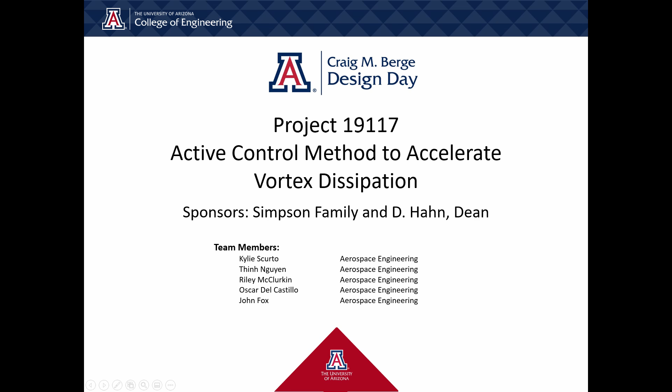Our project stemmed from a need to shorten time delay and increase safety during takeoff and landing of all aircraft on the runway. Today, it takes on average anywhere between 2 to 4 minutes between aircraft allowed to occupy the runway as a measure of safety against wingtip vortices.

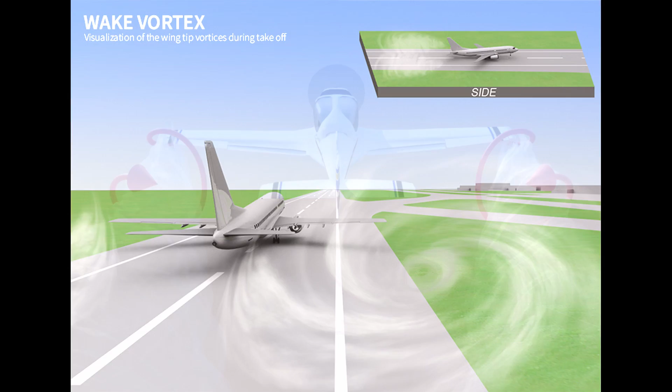These wingtip vortices form off the aircraft at takeoff velocities, creating circulation forces that drastically increase in strength with respect to the ground, making the atmosphere severely unstable for the next aircraft to attempt takeoff.

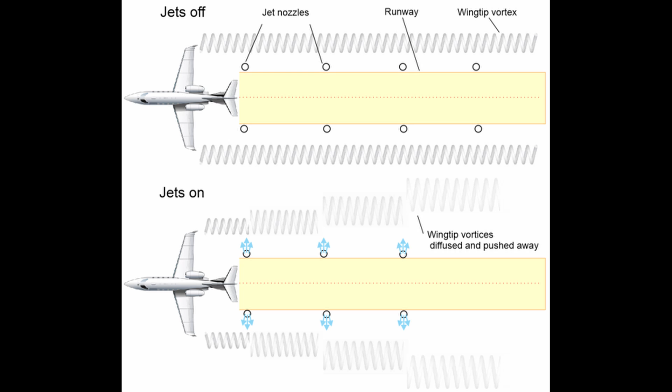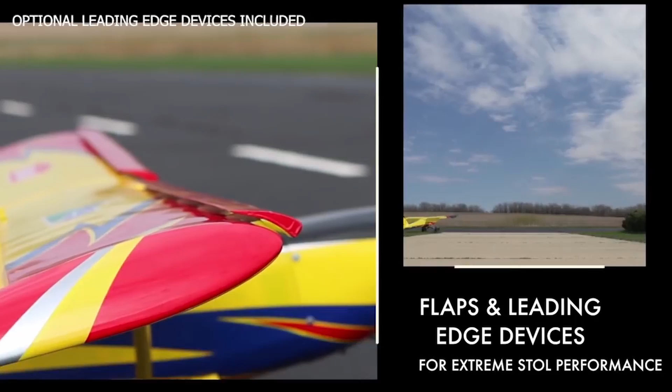We chose the Hangar 9 Timber 110 RC plane based on the cost, size, and functionality. For a given budget, we wanted to maximize the size and speed while also using an electric motor because of its simplicity and consistency compared to gas motors, which can be difficult to start.

The RC plane with the Rimfire 1.7 Outrunner can reach a speed of 34 meters per second and has a wingspan of 2.79 meters. A challenge we faced was the disorganization of the electronics in the fuselage.

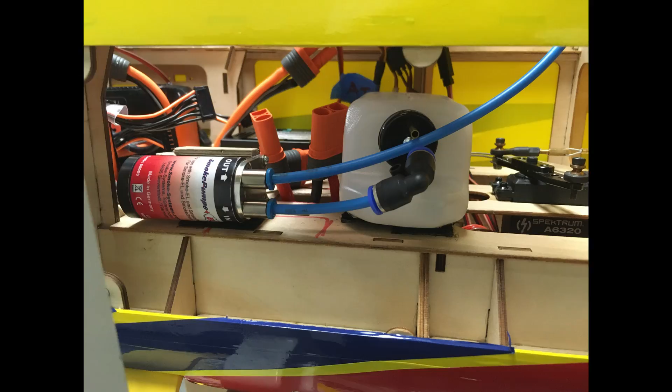By using Velcro and glue, we were able to allocate wires and objects to certain locations to provide easy access for pre-flight. The main challenge we faced was finding and correcting the center of gravity. The plane was tail-heavy and required placing weights in the nose of the plane in order to correctly balance the plane over the quarter chord.

The smoke system we used was a Smoke-EL system from Germany. It came with 2 smoke emitters, a smoke driver, a fuel pump, and an oil tank. It is powered by a 6S LiPo battery.

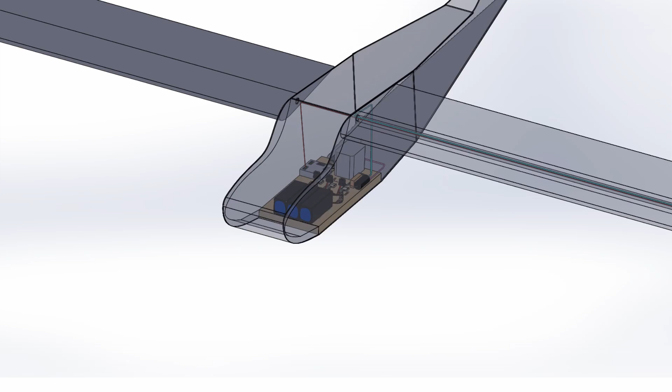As you can see, the smoke system is attached to the wingtip with the fuel line and wires running inside the wing.

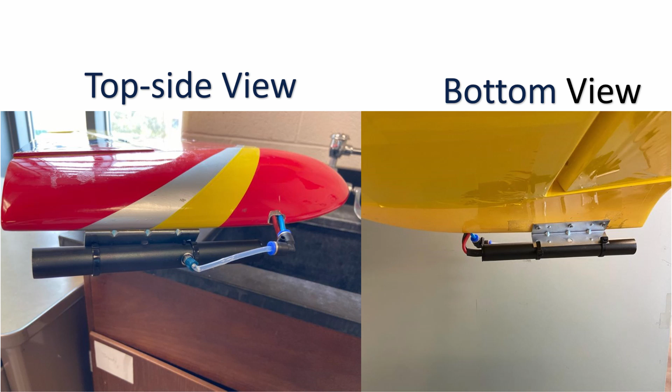Our first attempt to attach the smoke emitters to the wingtips involved square plastic command strips that held the smoke emitters with zip ties. Unfortunately, the high temperatures of the smoke emitters melted the glue and came apart from the plane. Before the COVID-19 outbreak, we had screwed metal brackets into the wingtips which we were going to zip tie the emitters to. And now John Fox will continue with the presentation.

The air-jet subsystem is composed of a compressed air cylinder, a brass adapter, a single-stage gas regulator, 2 heavy-duty air hoses, a switch, an electric pressure gauge, and a brass electric solenoid valve.

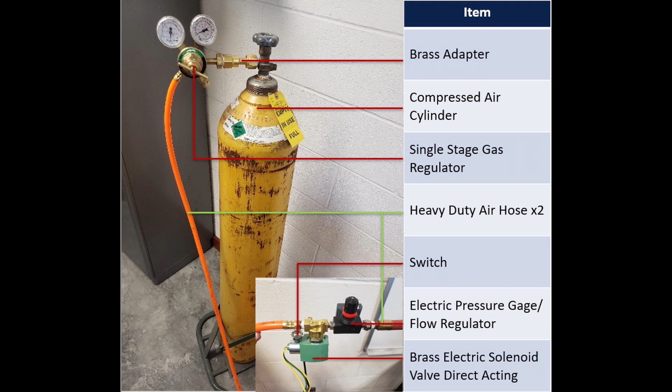The air-jet subsystem is expected to produce an output of 9 cubic meters of compressed air and have a total cost of $90. The cost, the portability, and the ability to produce a high velocity flow were the main reasons for selecting this air-jet subsystem.

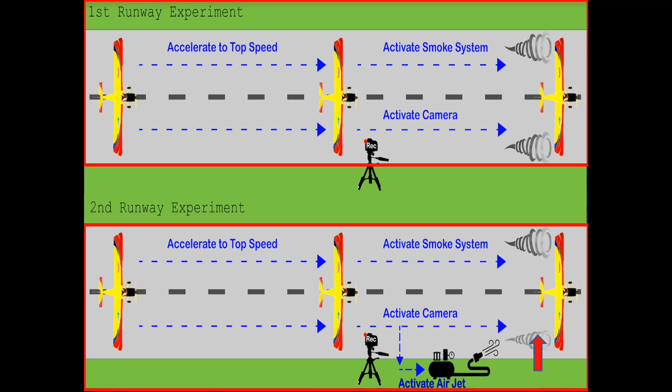Experimental setup. The camera would have been placed on an adjustable 16.5-inch to 50-inch tripod. Our objective was to record 2 different scenarios, without the air-jet system and with the air-jet system. These observations would have been made from 2 different camera angles, from the side of the vortex and from behind.

Software. To aid us with our vortex dissipation analysis, we would have used a proprietary software called Phantom Camera Control Application.

This software has the capability of calculating distances. This is done by correlating distances in pixels with distances in a real-world scenario.

Before any measurements, a calibration of the software must take place. This is done by defining the units and by using a calibration plate. The calibration plate used was a notebook with a height of 203.2 millimeters, placed approximately 1 meter in front of the camera.

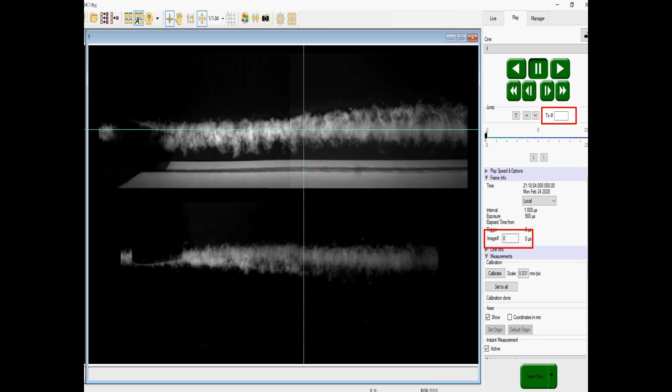One of the measurements used to calculate the speed at which the vortex dissipates is time. The PCC software has the capability of calculating time between frames by inputting the first frame number and the second frame number, for which you want to measure the time lapse between the two specified frames.

Vortex analysis. From the video without the air-jet system, we can see that the growth of the radius of the vortex barely increases. In other words, it has a constant vortex. This means that the energy is more compact.

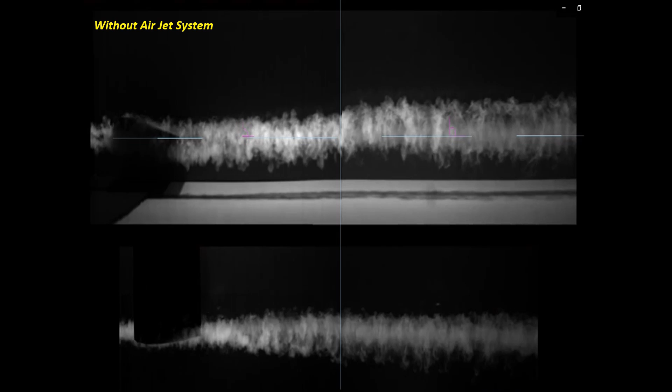From the analysis, we can see that the software and camera system are adequate for our needs. From the images of the video that we presented, we can also see that the air-jet system does dissipate the energy of the vortex.

The experimentation portion of this project consists of two separate but equally important sections of our mission. The first experiment is used to create a baseline for data. The RC plane and phantom camera will be set up as shown on the runway.

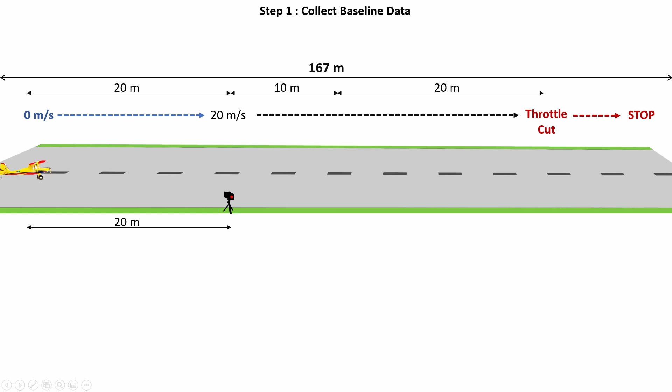The pilot will begin by accelerating the plane to its maximum velocity with the smoke system already initiated. Once maximum velocity is reached, the plane will pass by the camera where several images will be taken of the vortex smoke trail left behind. These images will then be processed through the camera software, creating the baseline for our analysis.

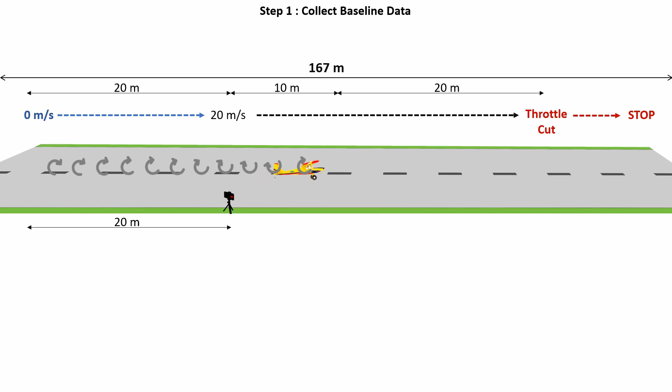Several trials will be done to determine the most effective position of the camera. After the baseline is created, we will then run the second experiment where the jet subsystem is now added to the side of the runway as shown here.

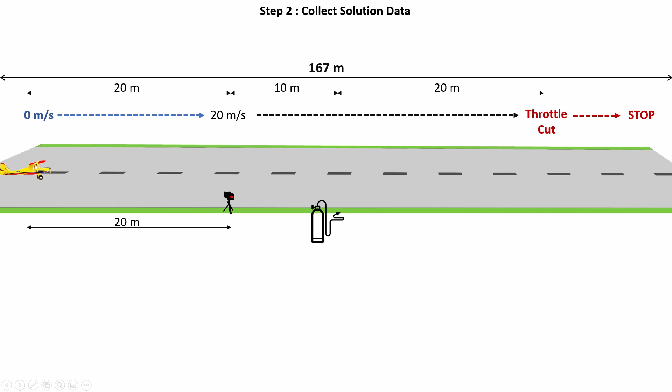Like the first experiment, the test will begin with the pilot initializing the smoke system and driving the plane to maximum velocity. This time, however, the plane will first pass by the jet system, causing it to activate and blow a stream of air centered at the core of the vortex.

Meanwhile, the camera will take several more images of the phenomenon to later analyze and determine the effectiveness of the jet. Again, several trials would be necessary to find the best position for the jet with respect to the core of the vortex. Upon success, more jet systems will be added along the runway in order to dissipate the entire vortex the plane would leave behind.

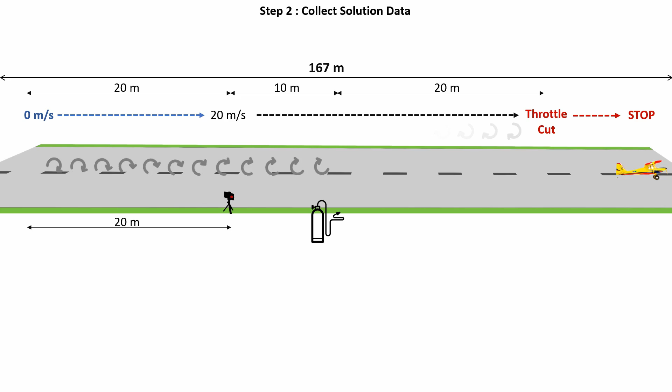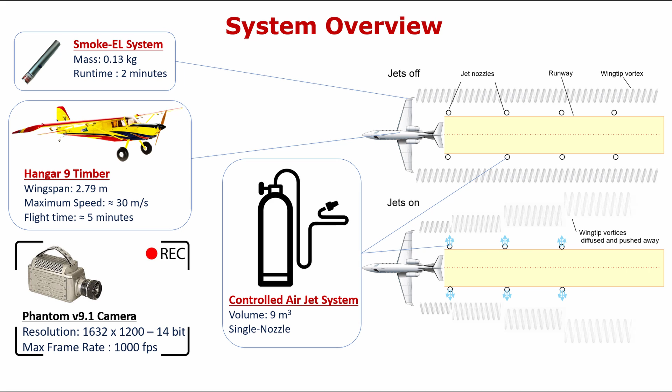Unfortunately, due to COVID-19 restrictions, our team was unable to perform either experiment. We were able to test each subsystem individually. The camera, smoke system, and jet system were ready to be implemented in the field. However, the team ran into some issues regarding the RC plane that held up further experimentation.

We hope in future studies, design teams will be able to run each of these experiments and obtain data that can further satisfy the goals of the mission, following which should be iterations of these systems represented on much larger scales that can be tested on large aircraft, in order to someday install accelerated vortex dissipation jets at all airport runways.